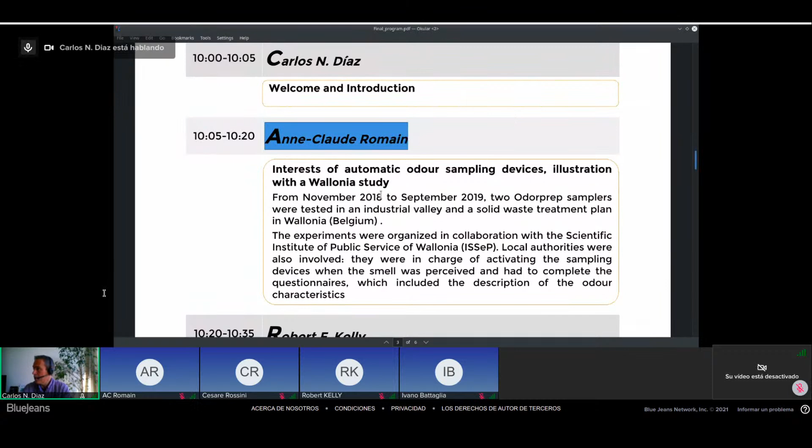So for this presentation, I'd like to comment a little bit on the program. So we have our first speaker, Anne-Claude Romain, who will speak about the interest of automatic odor sampling devices, with illustration from the Wallonia study.

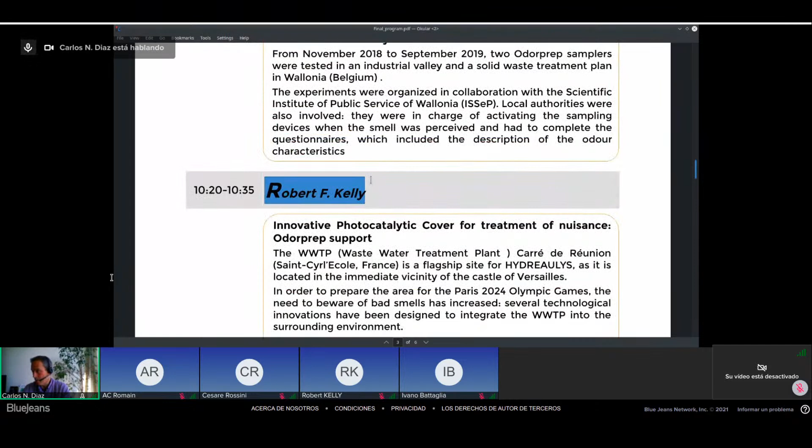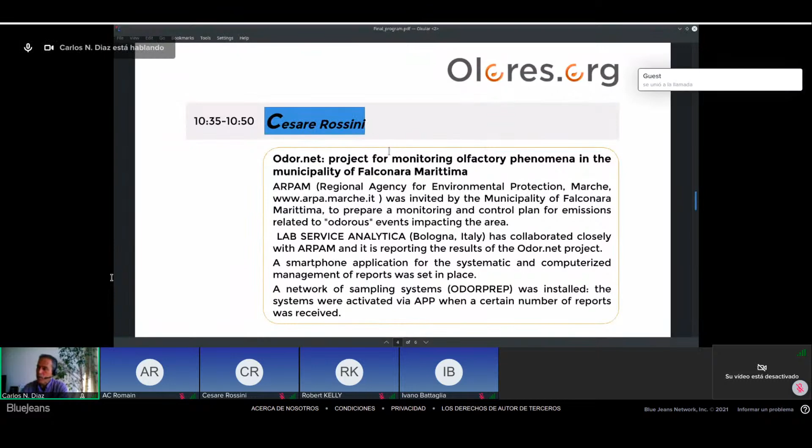Afterwards, Robert Kelly, Mr. Kelly, will speak about innovative photocatalytic cover for treatment of nuisance, Odorprep support. Later, Mr. Rossini, Cesare Rossini, will speak about OdorNet, a project for monitoring olfactory phenomena in the municipality of Falconara Marittima.

And our last speaker will be Federico Cangialosi, and he will speak about mechanical biological treatment plants, statistical evaluation of hydrogen sulfide and ammonia concentrations in ambient air, and criteria for automatic odor sampling.

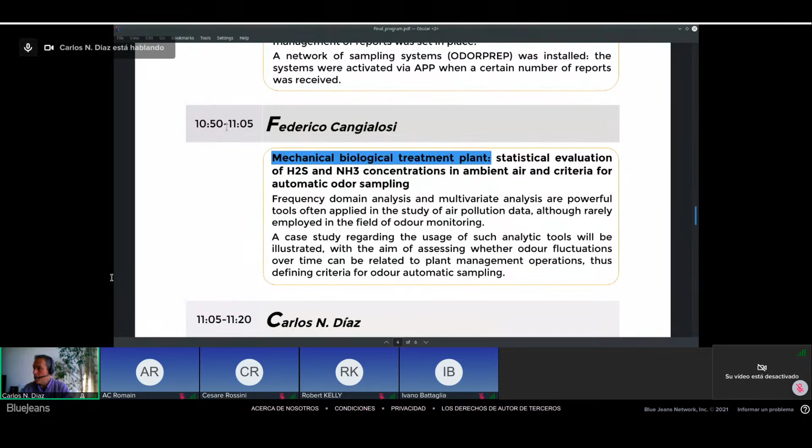Each speaker will speak for 15 minutes, and then we will have a round table that you can join. So there will be two ways to ask questions if you want. First, it's our YouTube channel - you can put your questions in this chat, and I will read them once I get them.

So there will be two ways: with the YouTube channel you can post your questions here, and if you want to make your question yourself, you can join this meeting room, and you are more than welcome to do so for any question or comment.

I think we are going to start now, and I would like to introduce you to Anne-Claude Romain. She studied chemistry and environmental sciences at the University of Liège in Belgium, and obtained a PhD on sensor arrays for environmental odor monitoring. Professor Romain is head of the research group Sensing of Atmospheres and Monitoring at the University of Liège, SAM, in Arlon, Belgium, since 2014.

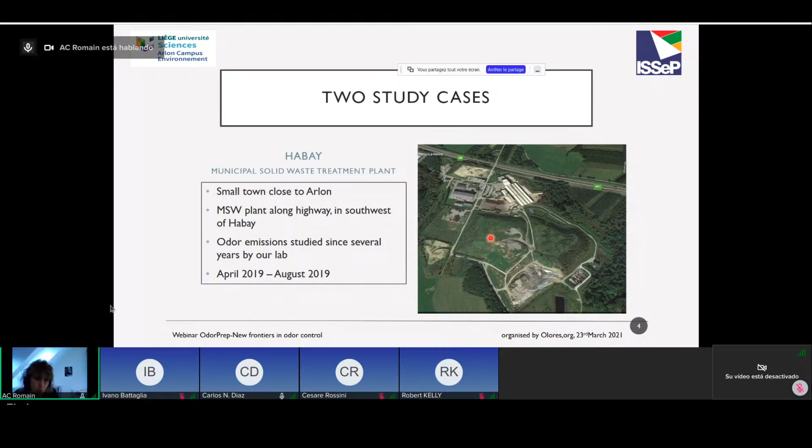The second case was Habay, an area our lab knows very well, having performed several odor measurements there for several years as well. The study was shorter, only 3-4 months, but I will not focus too much on this case, because we don't have time in 15 minutes to present everything.

Lab Service Analytica - I'm sorry if I don't use the correct term - Cesare lent us 2 Odorprep samplers for about 1 year. ISSeP installed 2 trailers equipped with chemical analyzers to perform continuous measurement of chemical compounds. We performed olfactometric analysis, and we used ADMS as an odor dispersion model software.

We also installed our own IOMS - Instrumental Odor Monitoring System - the new acronym for enose, at the site of Habay, but I will not focus too much on that today. What's also important in this study is that there's an app on the mobile phone for triggering the automatic sampling, which involves external people.

In this project, we involved 2 environmental officers of the municipality of Engis, and for Habay, a technician of the site, because they have to trigger the sampling with their smartphone, and so they are in charge of doing this. In addition to this, we gave them a questionnaire to fill in with a predefined frequency.

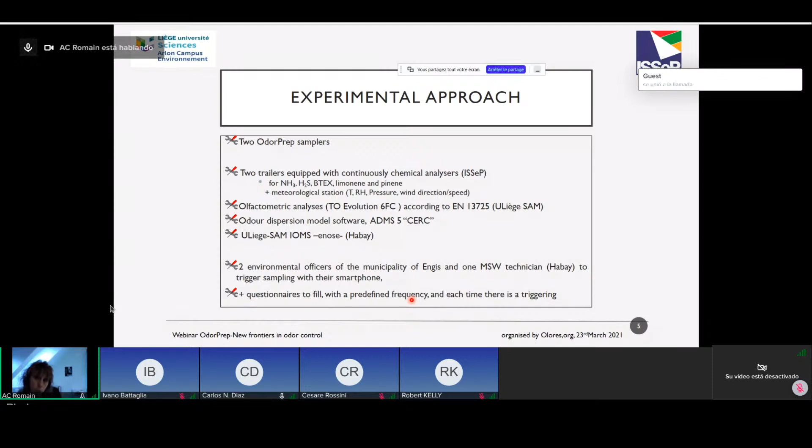And of course, each time there is a triggering, this questionnaire, among different things, requires them to mention and characterize the odor they smell, to be able maybe to identify the source, because as I explained for Engis, there are different sources of odor and different kinds of smell.

The recording has started. Sorry, I heard something strange. Sorry, it's just the recording. Just go ahead, Claude. Okay.

the sampler here, really close to one of the main odor factories here. So in the fence line, in the parking of this factory, and a little bit farther, the distance is about 350 meters from the parking.

It is close to a school, and the officers that have to trigger the automatic sampling are about 1 kilometer, a little bit less, from the automatic sampling system device. So I'll have no time to explain this.

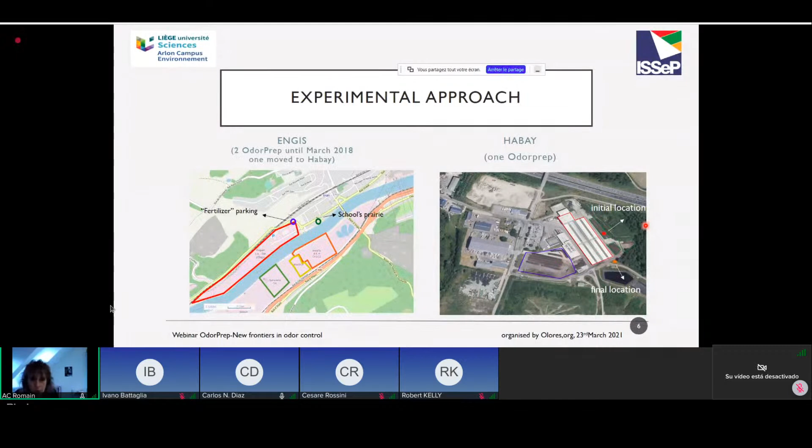So I go up. So 3 pictures to illustrate the localization.

You have the school here, and we installed the Odorprep in the prairie of the school. The big fertilizer factory is on the left side of the picture here, and the river, the Meuse, is in front of the school here.

You see the trailer, you see my colleague, my collaborator, Sébastien Failly from ISSeP, and the famous César here. And you can see that in the streets here, they are quite

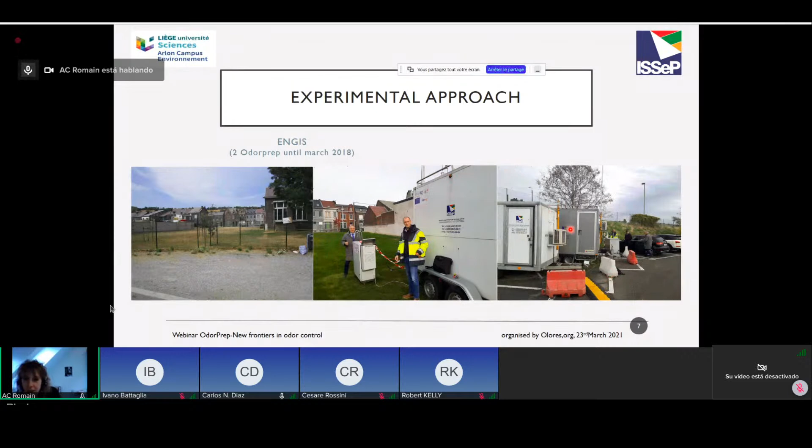typical organization of worker dwelling, worker homes here in the street. It is the parking of the fertilizer factory here, and again, the trailer and the Odorprep system.

So I would like to explain more data and results we got in Engis, but the time is very short, so I will have no time today to go into more detail. For your information, I will explain them in more detail during NOSE 2021. So this is also the reason why I don't want to give too much detail on this result.

But however, you can see that on the 2 locations in Engis, we got 6 triggerings, about 5 days during 8 months of study.

So it's really low, and we are a little bit disappointed about these results, because usually there are more complaints, and we really wanted to get more data for our study.

For the citizens, it's great, but for us, it's not so great. It was not so great.

And you can check here the value, the concentration you get, so in the fence line, and a little bit farther, so at the receptor level here.

We can discuss, but I will not do it, how we could use this kind of information to perform odor dispersion modeling, but I will not take too much time on this today.

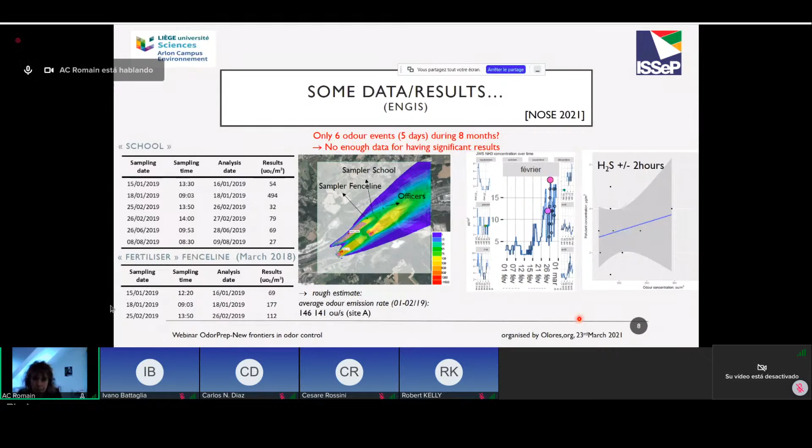So the main scope of this Wallonia project was to evaluate Odorprep, and it is the title of my talk here. I would like to give you my first impression, but it was 2 years ago, so to be honest, I haven't really tried the Odorprep system since this first experience for different reasons. Maybe there are some aspects that have changed since that time.

But however, the good point of this automatic system is that it is really a good approach to be able to collect odor at the receptor level. It's a good way, really a sampling that is representative of the perception at the receptor level, because it is activated, triggered by a mobile phone app, by a citizen, by an officer, by a company. So it is really interesting from that point of view.

As you probably know, sampling at the receptor site is often challenging due to the low odor concentration that we have at the receptor, and even sometimes at the fence line. As you all know, especially if you have already performed field inspection - in Belgium it's a way that is used frequently - the perception time of an odor is short, it's called a puff. So in that way, if the people that trigger the activation of the sampling are really representative of this, we are able to catch a low odor concentration.

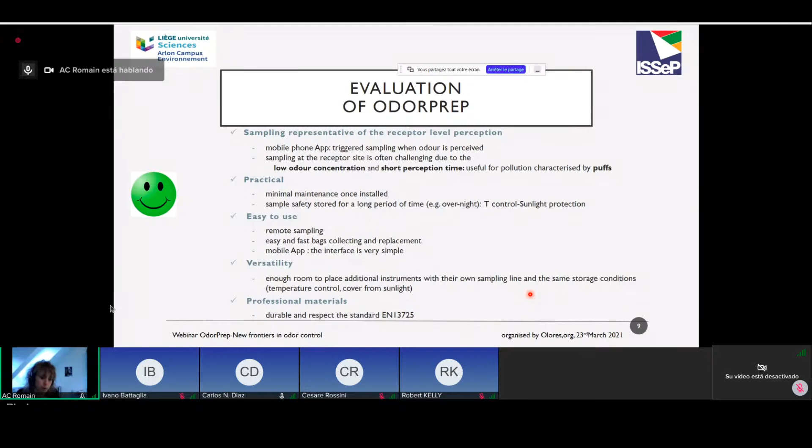However, we had some proposals or some questions that we can discuss, but again, maybe there have been changes now since 2 years ago.

The trouble maybe could be linked to the electrical supply, because we also have automatic sampling systems with battery, since it's quite light and we can move it very fast. But here, for temperature control for instance, we need high voltage, so it's important to notice this - you need to have access to electrical supply.

The size of the sample bag could be a little bit higher, especially when we are working at the receptor level, because the concentrations are very low.

When we tested the Odorprep system, we only had Nalophan materials at our disposal, but as you know, for some compounds - especially ammonia and H2S - that's not a good one. So I guess maybe they propose other kinds of material now.

The flow adjustment - it would be great if we could be able to adjust the flow ourselves. And we propose maybe to couple this device with a cloud to have an idea of the localization, and maybe a webcam to be sure that people don't put a strong odor above the sampling line. Why not? You can imagine.

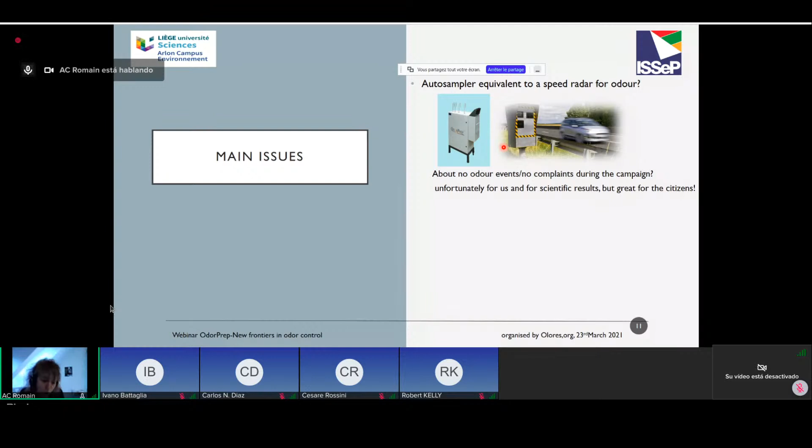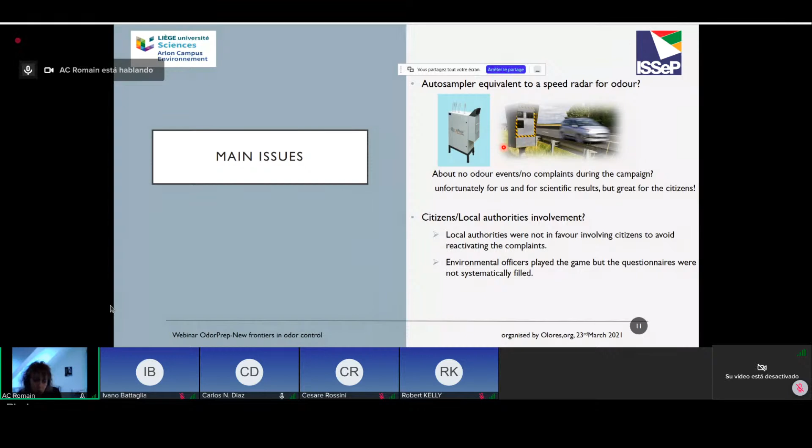Involvement of the citizens was not as nice as we would like to have had, but I have no more time to go into more detail, because Carlos reminds me that I don't respect my time, as usual.

I'm sorry. So I mentioned here the main interest because it was the title of my talk, and I expose here also the main interest, but I have no time. You can read it, since you will have my presentation at your disposal, and so you can see here the consideration regarding the interest of this system. Thank you very much, and sorry for not respecting my time perfectly.

And thank you to Sébastien. I know he's listening now, and my colleague Noémie, Cédric, David, Axel, and the people that were involved in the 2 case studies. Thank you.

Today, I'd like to present to you one of our solutions within Suez, which we call ActiLayer. It's an innovative solution for the treatment of nuisance odors from diffuse sources via photocatalysis. And of course, the link to the previous presentation is how we integrated the use of the Odorprep automated sampling device within 2 reference projects that I'd like to share with you.

So just to quickly get started, so you have an idea of who our team is, because Suez is a large organization. We're part of a division known as Smart Environmental Solutions, and in fact, we're the Air and Climate division.

So if you look at our activities, they fall into 3 main categories. The first, which we'll focus on today, is really about nuisance odor impact and integrating industrial activities within the local environment. So we're really focused on odorant compounds, volatile organic compounds, H2S, reduced sulfur emissions.

We also work more and more on urban air quality initiatives, and you'll see it's similar strategies, but on different types of pollutants, with a link more focused on public health initiatives. So we're talking about fine particulate matter or NO2 emissions.

And then finally, the third category is on surveillance and mitigation of greenhouse gas emissions. So not really an air quality initiative per se, but more linked to climate change initiatives.

But irregardless of which of these three areas we're working in, what's important to know is that we operate as a solutions integrator. It means we work with an ecosystem of partners such as LabService Analytica. We're not only working with in-house solutions, we're trying to bring to our clients the best of technology that's available on the market. And we're present along the entire value chain.

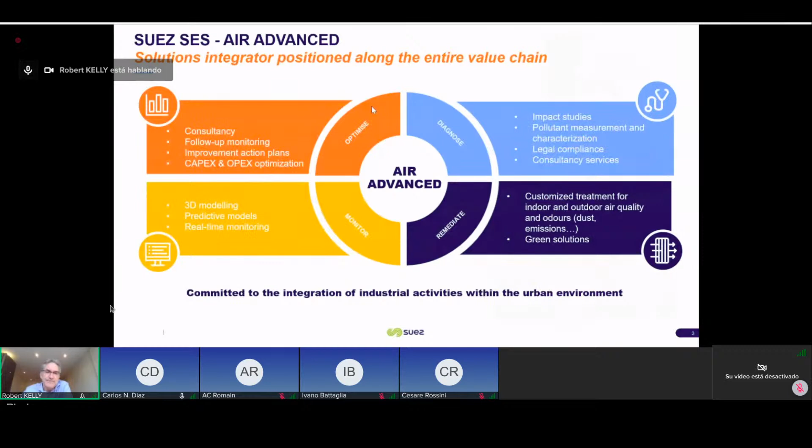But really, irrespective of the project, our main focus, our commitment is to identify strategies to better integrate industrial activities, industrial infrastructure within an increasingly urban environment. I'm sure many people have noticed that infrastructure such as wastewater treatment plants, composting facilities, landfilling activities, or even industrial parks are really facing urban encroachment. It means we have residential neighborhoods coming up right up to the fence line of the facilities.

And so we have to come up with innovative strategies to go beyond just risk management and to really focus on environmental footprint and really having a more proactive approach in terms of quality of life for the local community.

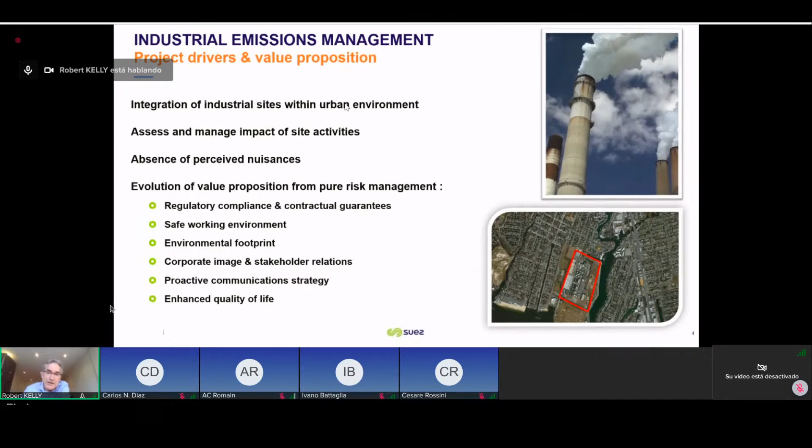So with that, I'd like to focus on really two technologies today. The first, on the treatment side, is our ActiLayer technology. You can see here an installation that I'll focus on just outside of Versailles. It's a photocatalytic cover. But what's interesting is that it really performs a couple of functions in one.

Well, first of all, it's a cover, so we have confinement of emissions. But here you can see a simple schematic of how it's made. So we have an activated carbon layer, so we have adsorption of any pollution below the cover.

We have an integrated titanium dioxide catalyst, which with UV irradiation, so sunlight, is going to produce free radical species that will degrade any pollution that is adsorbed in the activated carbon layer. So we have complete mineralization of the pollution and regeneration of the activated carbon.

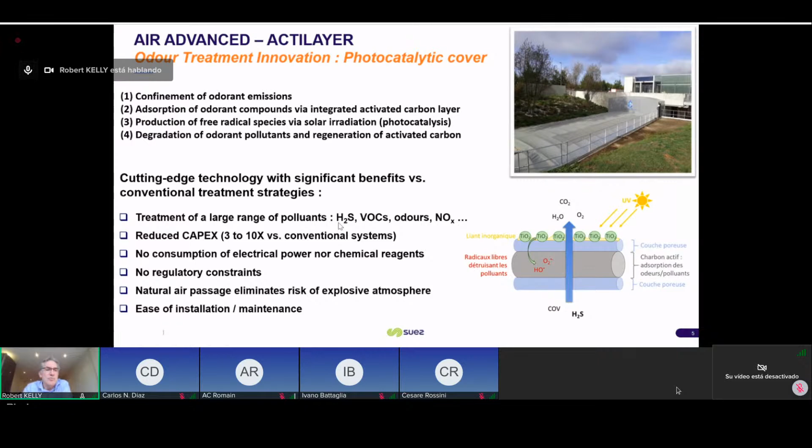For us, it's a very interesting strategy for treatment of really difficult emission sources, open air tanks or canals with diffuse emissions. Much lower capex than a traditional approach where if I had to put in place a concrete cover, a ventilator to extract the air, and a dedicated odor treatment system. I have no electrical power nor chemical reagents, so it's very easy to put in place and to maintain.

And of course, the second innovation I'd like to focus on with these couple of references is the Odorprep device. Anne-Claude presented it earlier. Really what is of great interest to us is the ability to do remote sampling on demand by plant operators, by a system administrator in the middle of the night whenever we have an odor event. And also the fact that we can tailor the configuration of the device to have different types of sampling. So we can have cartridge sample for collecting an air sample for dilution olfactometry, or we can put in a Tenax cartridge for VOC screening, for example.

And just to walk through quickly two use cases. So I mentioned this is the Carré de Réunion wastewater treatment plant. It's in close proximity to the Chateau de Versailles. Here you see this is the inlet wastewater channel. You can see it was an open air channel, approximately 200 meters in length.

You'll see in some pictures that we have a new tramway passing directly in front of the plant. And in 2024, the equestrian show jumping events will be located quite closely. So the local mayors are very sensitive to this open air source and asked us to come up with solutions.

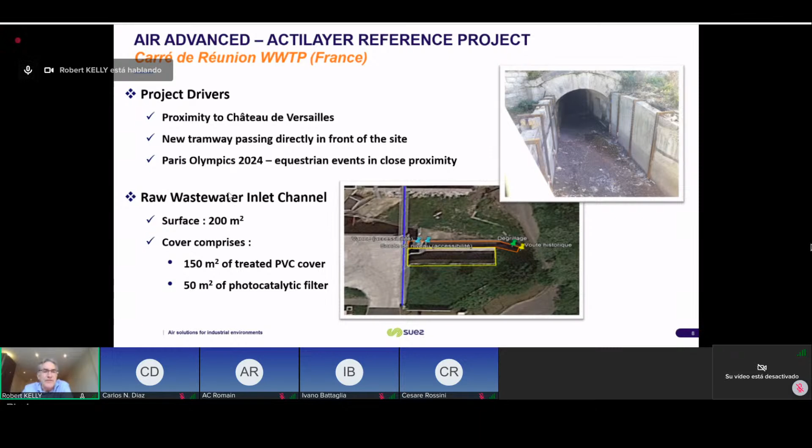Well, after comparing different alternatives, we decided to proceed with a photocatalytic cover. Of course, we used the Odorprep as a sort of innovative performance monitoring strategy. First of all, to sample before we put the cover in place over several months to understand background odor concentrations.

The Odorprep was configured with two parallel channels, again with sampling bags for conducting odor concentration in the lab via dilution olfactometry. And we could remotely sample whenever the plant operators told us that there was a nuisance event in the vicinity of the channel. We could remotely take the sample.

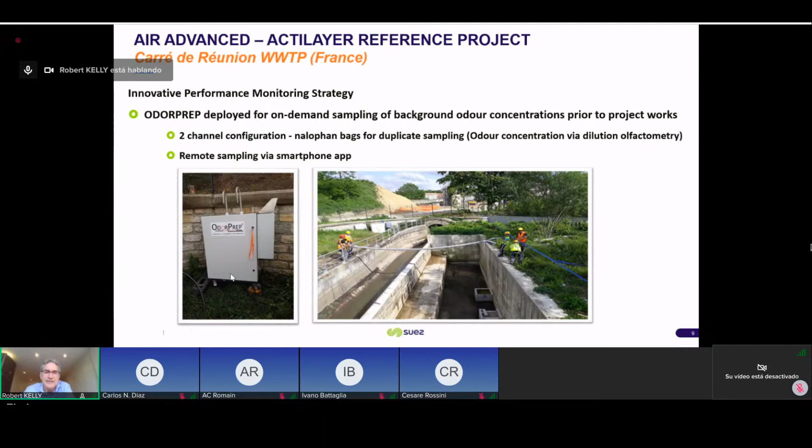Well, just some images of putting the cover in place. So here we put quite a sophisticated support structure because the vault was actually, well, it's a side story - it's a national monument, it's Louis XIV. So the client wanted to preserve this kind of vaulted look of the overall finish.

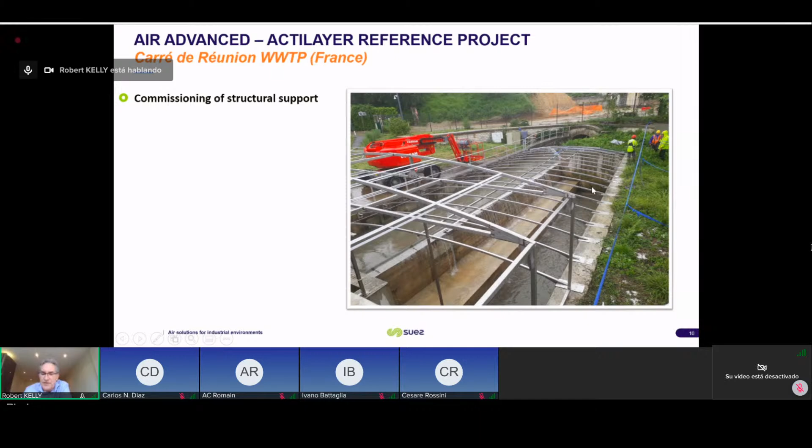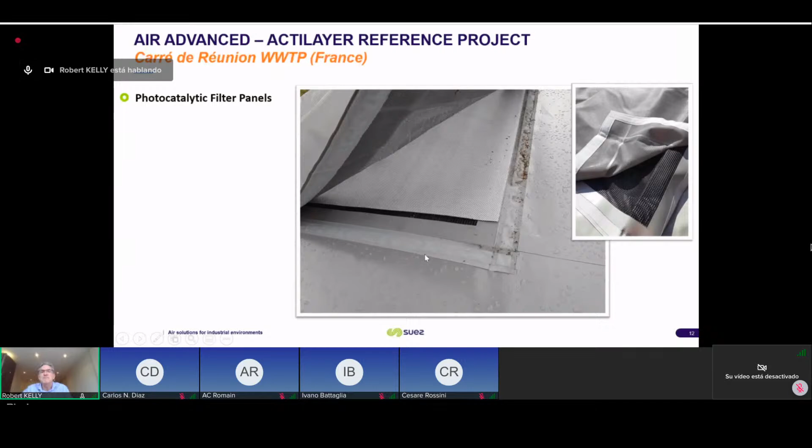Here you see us putting the actual cover in place. Just a close-up on the photocatalytic filter patch. So you have a type of chemically resistant PVC cover, and then these photocatalytic filter patches that are placed using heavy-duty Velcro at intermittent intervals integrated within the cover.

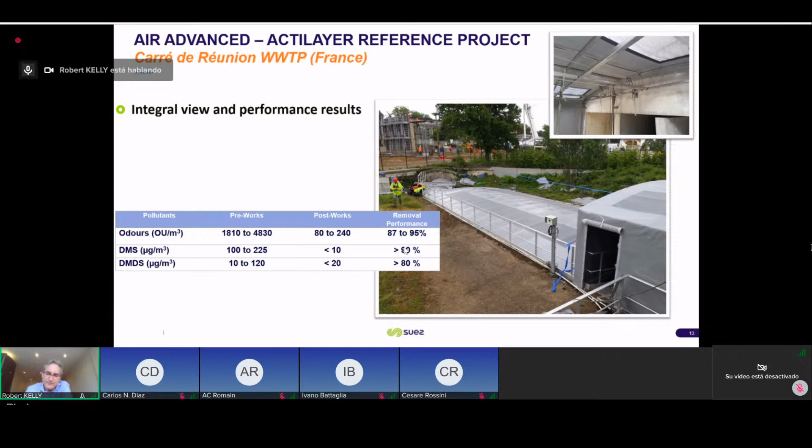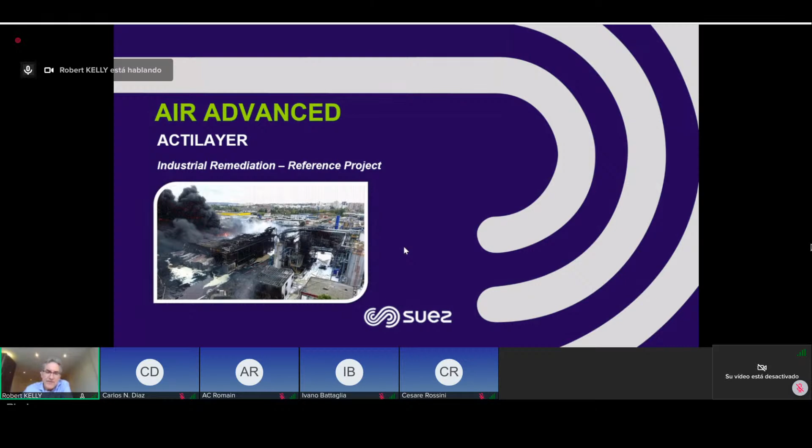And just to focus on a second reference case to give you another idea of how we used the Odorprep. What I should mention is on the first project, it was a loan from Lab Services Analytica that was part of an ongoing European initiative that they had to test the Odorprep device. For us, we were absolutely convinced on the interest, and we purchased, subsequent to that first trial, 2 units for use on this next project.

So here we're dealing with a different type of a project. This is an industrial remediation subsequent to an industrial warehouse fire. So here you see an image of the fire where you had a chemical warehouse that was storing highly odorant compounds.

Our project within Suez and our partner consortium was to demolish the remaining structures and remediate any waste debris on site. We had a lot of barrels in various states of degradation that needed to be remediated on site.

What was very important for the client was to have real-time air quality monitoring, as well as nuisance odor impact monitoring, as a critical decision aid tool to manage the on-site works with as little impact on the surrounding neighborhoods as possible. We're directly inside the city, with apartment complexes just a couple hundred meters away. This was also highly publicized, with a lot of news media coverage, so we wanted a very transparent and reassuring communication strategy.

We configured each of the Odorprep units as dual channel units, with sampling for dilution olfactometry but also TDX cartridge sampling, since we knew VOC emission screening was a big part of what our client wanted to focus on.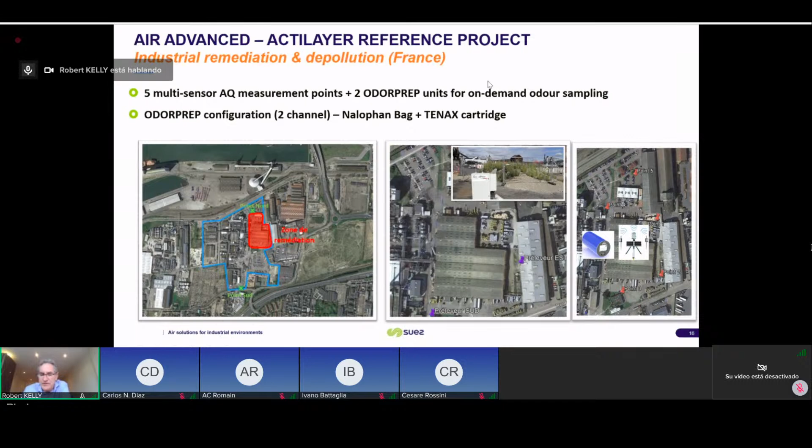The other critical highlight of this project is that we had to build a temporary support tent for handling the most sensitive waste. These uncombusted barrels of compounds that were highly odorant were taken inside this tent for cleaning and pre-treatment before being taken to an offsite waste handling facility.

Here we have a combined ventilation and air treatment system where photocatalytic filter patches are directly built in - these are coated canvas ventilation gains with photocatalytic filter panels integrated within one face of the ventilation gain.

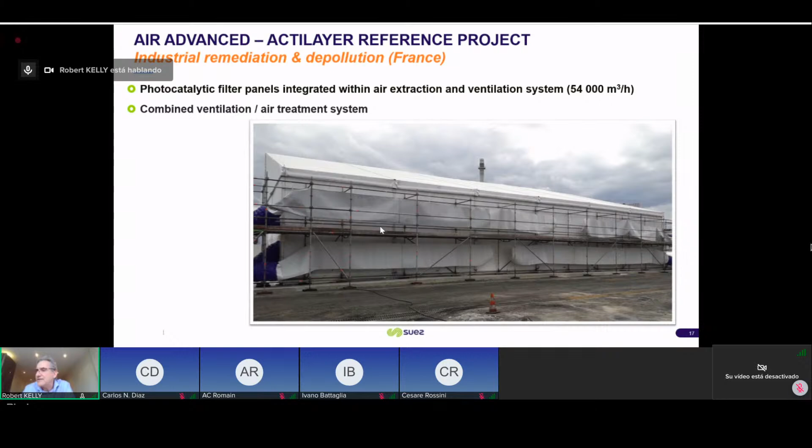We used the Odorprep at the very beginning of the project to better understand what types of compounds we were dealing with and their odorant effects. We used it inside the tent as a pre-screening test, collecting samples whenever operators informed us of highly odorant species present. We'd collect on-demand samples and send them to the lab for GC-MS sniffing, so even for compounds present at very low concentrations but high intensity odor, we could try to identify the compound.

We also used the units once the project was up and running and our treatment system had been properly tested and validated. We installed the Odorpreps at the 2 points I mentioned, at the limits of the remediation works, to survey in real time, doing both automated sampling whenever we had a resident complaint, and programmed sampling since we had environmental reporting to do throughout the project.

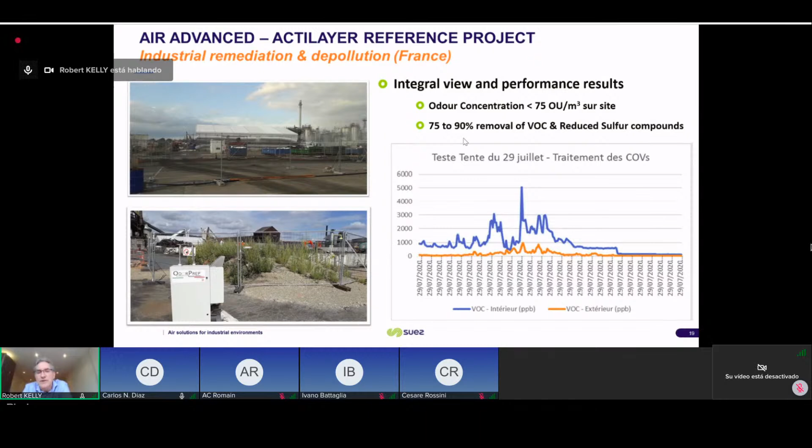What I can show is that at the limits of the works, we never had odor concentrations that exceeded 75 odor units per cubic meter. And in the vicinity of the tent, comparing the interior versus the exterior, we showed on the order of 75 to 90% removal of both total VOC compounds and total reduced sulfur compounds - so very efficient performance.

You have 1 minute, Robert. And that is the last slide, Carlos. So that works, yeah, just wonderful. I'll be happy to answer any questions later on during the roundtable.

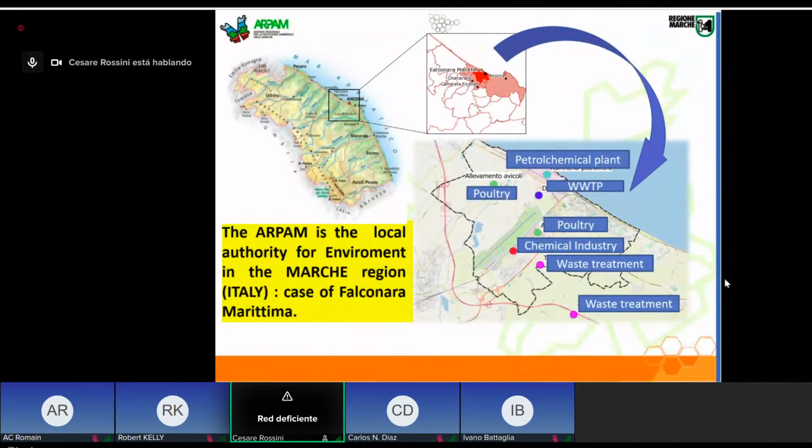The area that ARPAM wants to keep under control has different environmental pressures of anthropogenic origin. There are relevant infrastructures like the Adriatic Railways line, the State Road Adriatica, the civil airport, and importantly, industrial activities that due to their impact need regional and provincial authorization—mainly petrochemical plants and wastewater treatment plants.

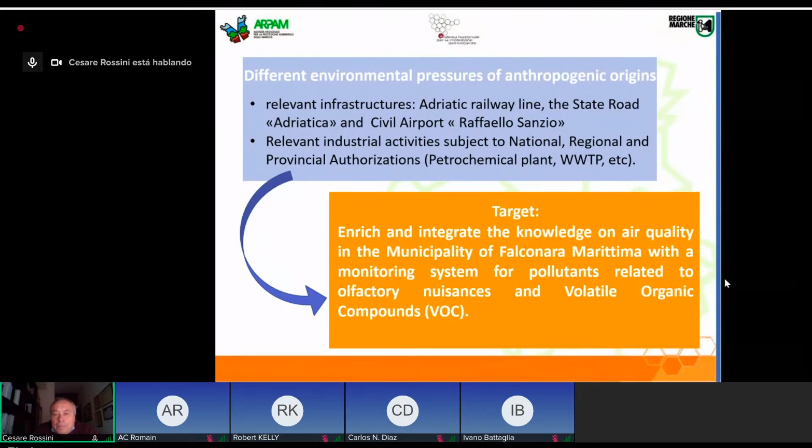So what was the target? The target was to enrich and integrate the knowledge of air quality in the municipality with a monitoring system for pollutants related to olfactory nuisances and volatile organic compounds.

What was the starting point? In Falconara Marittima, citizens had long been concerned about the presence of odor and related discomfort, but reports were done by telephone. These telephone reports were collected by the municipal administration and police but were not treated in a systematic manner regarding the entity, the type of perceived odor, the weather condition, and the wind direction.

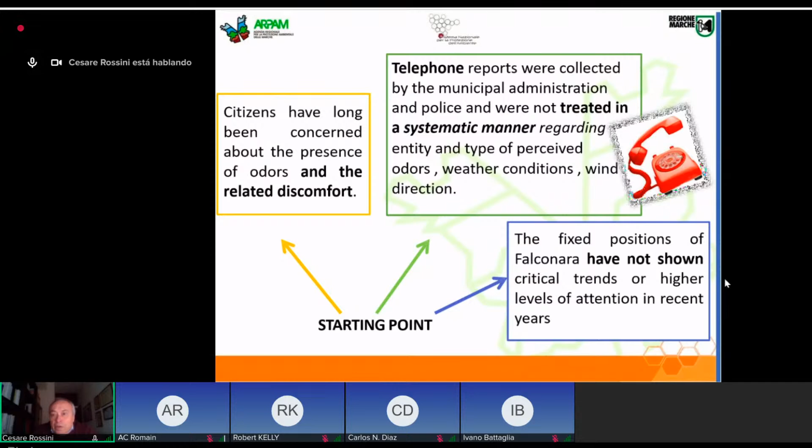So ARPAM, the local authority, was invited by the municipality of Falconara Marittima to prepare a monitoring and control plan for emissions related to odorous events impacting the area. This plan is based on the computerized and geo-referenced management of citizen complaints of olfactory harassment, allowing immediate intervention capable of answering: which area of the city is most affected by odorous events? What are the trace substances present in the air and at what concentration? And what are the sources of emission?

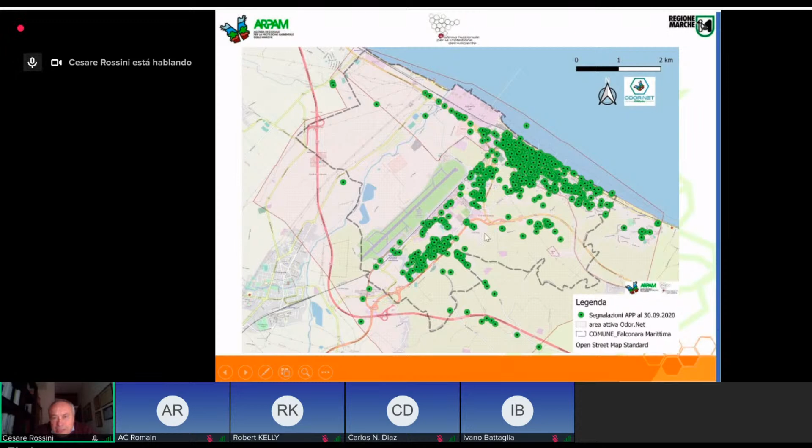Worth mentioning, looking at the statistics, is that odor events clearly show a peak period—August, September, July—clearly in the summertime. Also worth mentioning is the growing interest of the population in being part of this GIS exercise. At the beginning only 41 people took part, but by the end of the process, 340 people were participating. This means the population liked being involved in this type of surveillance exercise.

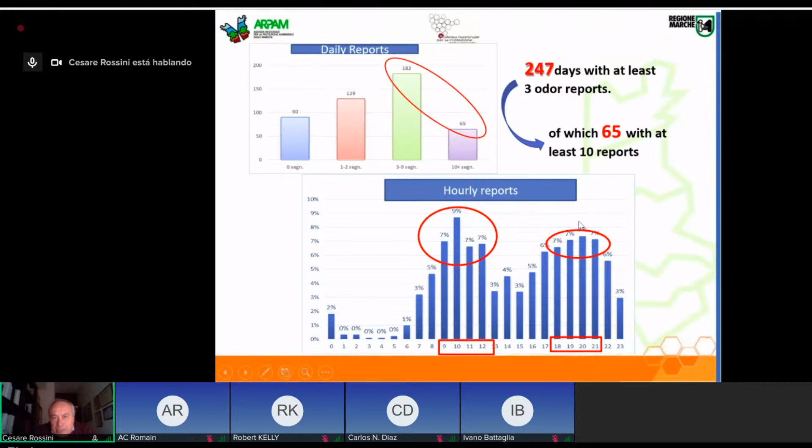Other information from this surveillance program shows that 66% of the odor reports described a hydrocarbon-like odor. Clearly the presence of the petrochemical plant is dominating the situation here. Also important is that more than 80% of the total complaints were evaluated as very strong or strong, as you see from this diagram. So definitely the impact on the population was heavy.

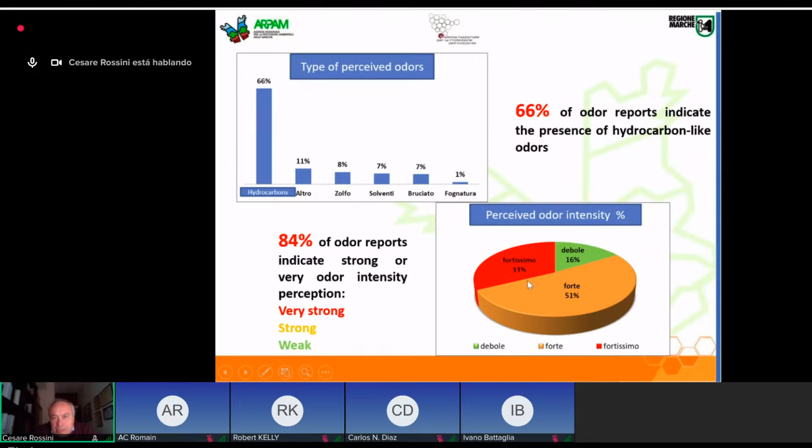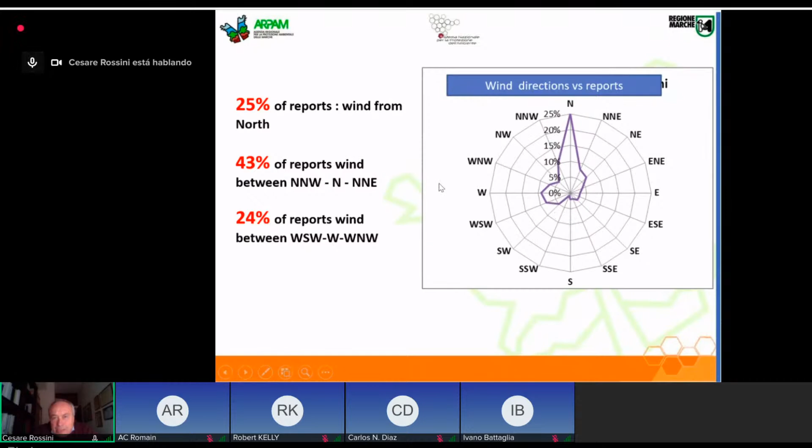We also collected information regarding wind direction, which mainly arrives from the north when you are perceiving the event. The study of the complaints shows the highest concentration in the site of Falconara Centro, and also this area is where there is the highest level.

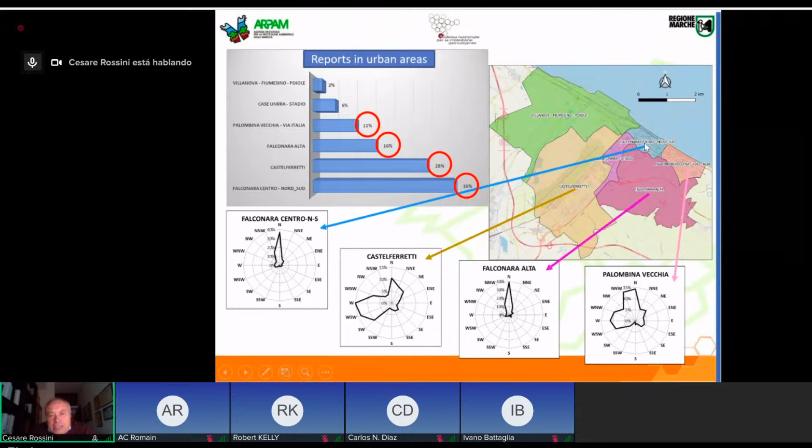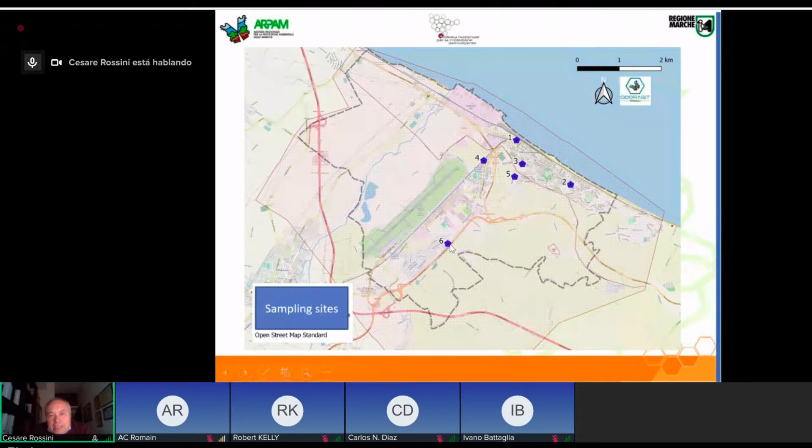We decided to have fixed positions for measurement. Five of them are very close to the sea, and one is more inland, close to the airport. The sampling started in July 2020.

Each sampling station consists of a Nalophan bag, two Nalophan bags, and a chemical cartridge. In addition, there was a PID detector analyzer for real-time monitoring of total VOC compounds, just to have a second source of information. There was also a weather station.

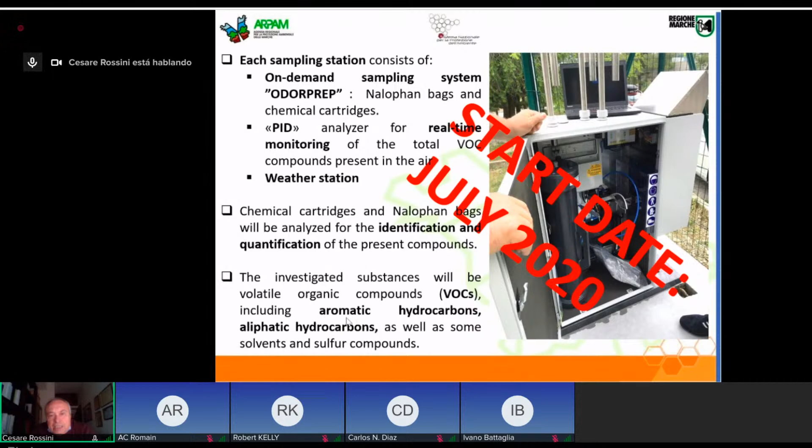The chemical cartridge and the Nalophan bag were analyzed for identification and quantification of the compounds present. Compared to the other exercises done by Claude and also by Robert, here the local authority decided to have only chemical measurement, since they have a lab able to perform this type of analysis locally. So the local authority decided to use this tool to investigate the volatile compounds, including all the different compositions.

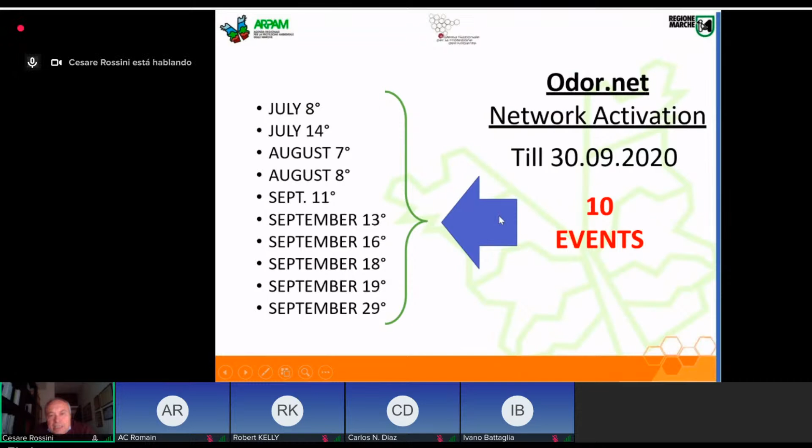What's worth noting is that during the summertime there were several events, 10 events. I will show only 2 of these, which are fundamental for understanding what was going on.

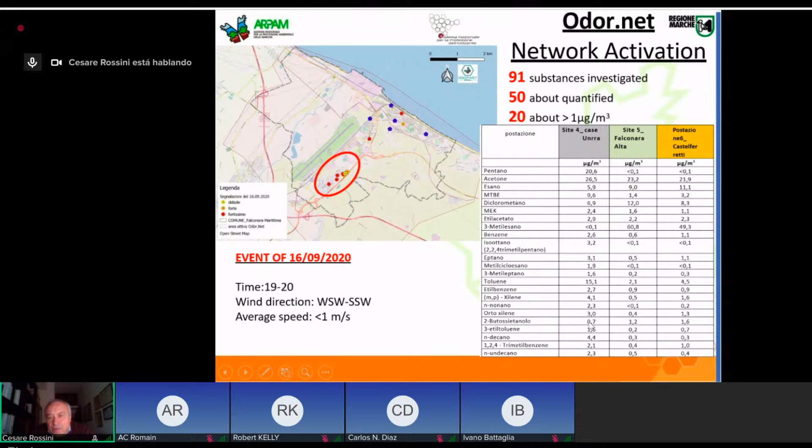To resume, since time is running: next steps are increasing the number of results and cases available over time. Statistical analysis can provide more information on the characterization of odor events in order to associate them with the value production process—this is the final goal. Clearly, transparency with citizens will continue, as well as the connection with local industry.

Thanks a lot for your attention. I hope this story can be interesting for you, and I hope to have you during the discussion for additional information.

Thanks to everybody. Thank you very much, Cesare.

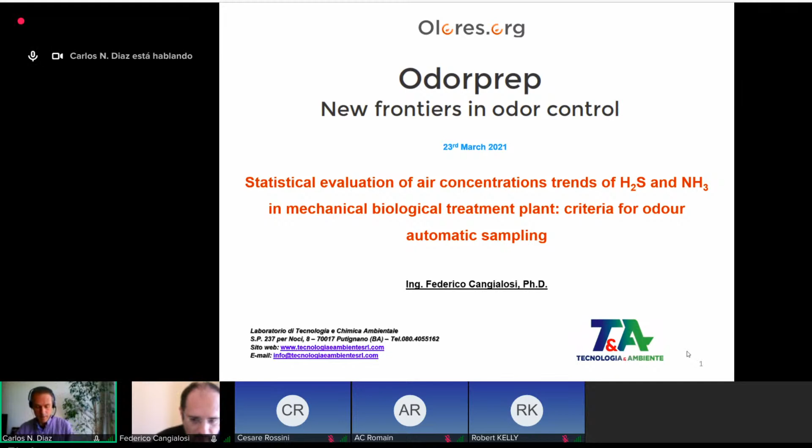Okay, thank you, Carlos. Can you increase a little bit the sound of your microphone? You hear me now? Yes, now better.

In our presentation, we will describe a case study in which we use the Odorprep systems and other automatic monitoring devices for identification of the odor complaints deriving from a nearby town. The goals of the research are the identification of the most suitable monitoring stations and chemical tracers for odor monitoring, and defining the criteria for odor automatic sampling.

So far, we have seen the Odorprep activated with human triggering. In this case, we will see how to define criteria for activating the Odorprep with instrument measurements. And we will use some interesting tools for continuous odor monitoring in terms of time series analysis, frequency domain analysis, and multivariate analysis.

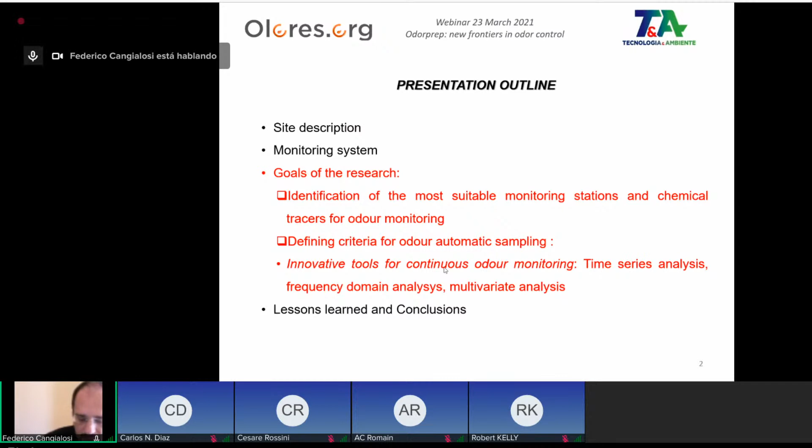The site is a mechanical biological treatment plant authorized to receive 550 tons per day of mixed urban waste, and 3 monitoring stations were installed in 2019. Station 3 was located upstream with reference to winds blowing towards the urban center, which is south, 1 kilometer from the plant, in front of the building for waste acceptance.

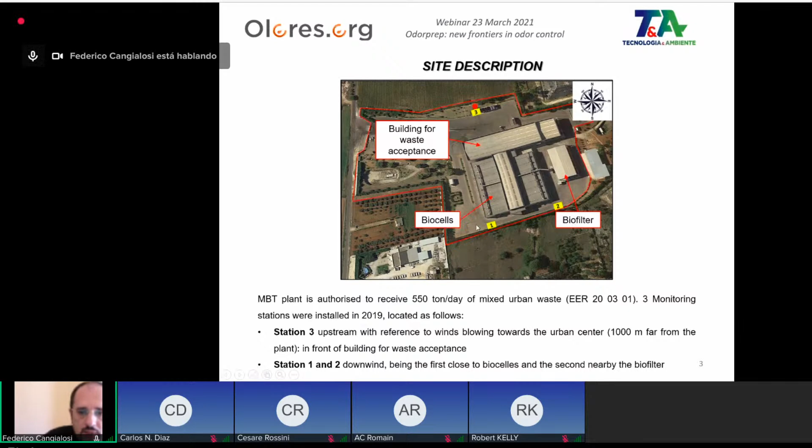Stations 1 and 2 are downwind, the first one located close to the biocells and the second one close to the biofilter. Each monitoring station was equipped with an H2S analyzer, an ammonia analyzer, and a VOC gas detector with the Odorprep V3. We also had the weather station at station 3.

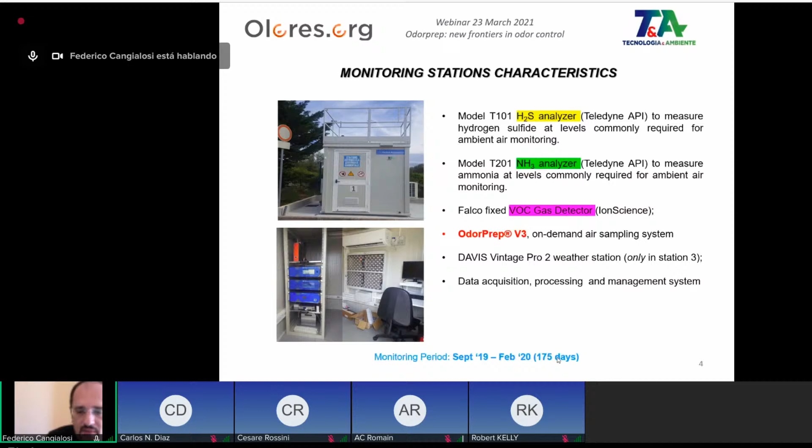The system was completed with data acquisition, processing, and management system. The monitoring period for this study went from September 2019 to February 2020, with about 175 days. The first look at the data we give in this presentation is the time series analysis.

Apart from a very high value on these days, we see quite low concentration, and we can see a cyclical daily component in the data. So it seems for this data that VOC is not related to the fluctuations of the emissions from the plant.

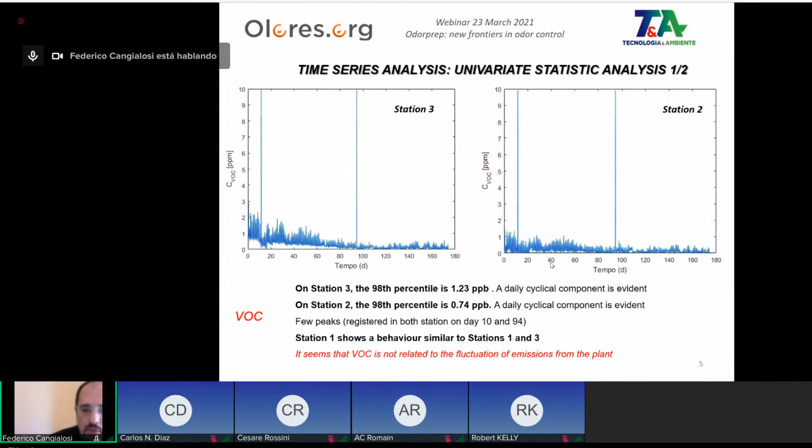In fact, if we look at the ammonia concentration in station 2 and station 3, we see a difference in terms of concentration. The 98th percentile for station 2, close to biofilter, is 303 ppb against the data from station 3, which is much lower. So it seems that ammonia could be a good parameter to be related to the odor emission from the plant, and in particular from the biofilter.

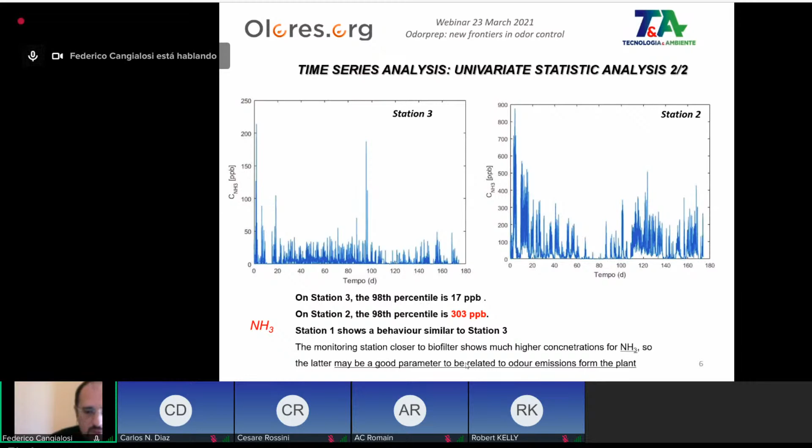We also performed a kind of analysis we call persistence analysis. This is an analysis in which we search for time intervals in which a certain threshold value, y, has been exceeded consecutively for more than x minutes.

All the instruments have a sampling frequency of 1 point each minute. So we decided that we can define an odor persistence if the concentration is above a certain threshold for more than 5 minutes. For the threshold values, we look at different concentrations. 3 values were selected for each station and each compound, 2 values below the 98th percentile and 1 value above that. For stations 1 and 3, they are the same order of magnitude, while in station 2, especially for ammonia, the values are quite higher.

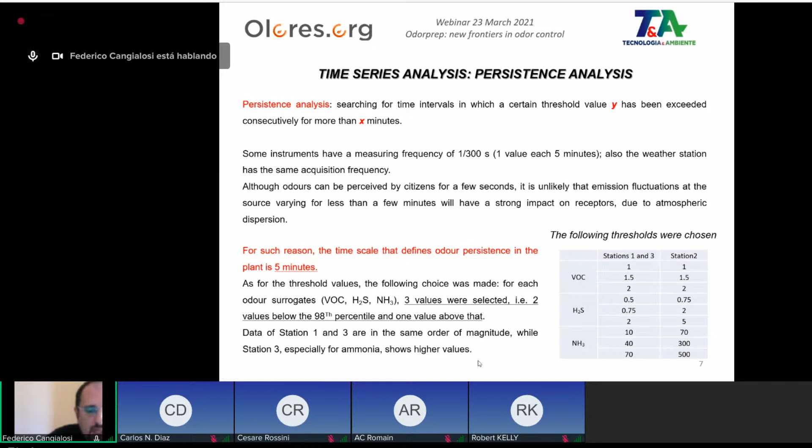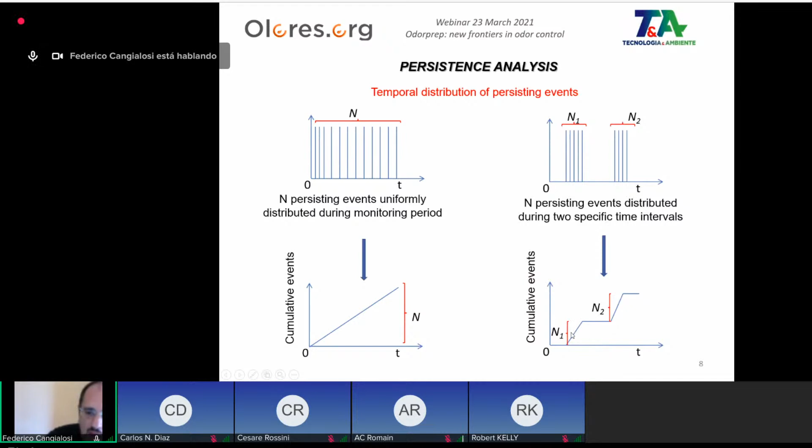While in the other case, if we have n persisting events distributed during 2 specific time intervals, like in this picture, the cumulative event distribution has 2 steps, like in this picture.

So if we look at the persistence analysis of ammonia at station 3, we can see that events above 10 ppb are quite frequent throughout the monitoring period, so we can say we have a uniform distribution. While extreme events at station 3, close to biocells—events higher than 70 ppb—occur in the first day of monitoring, shown by the red line here.

When we look at station 2, close to biofilter, events above 70 ppb are quite frequent, and we see here the step pattern.

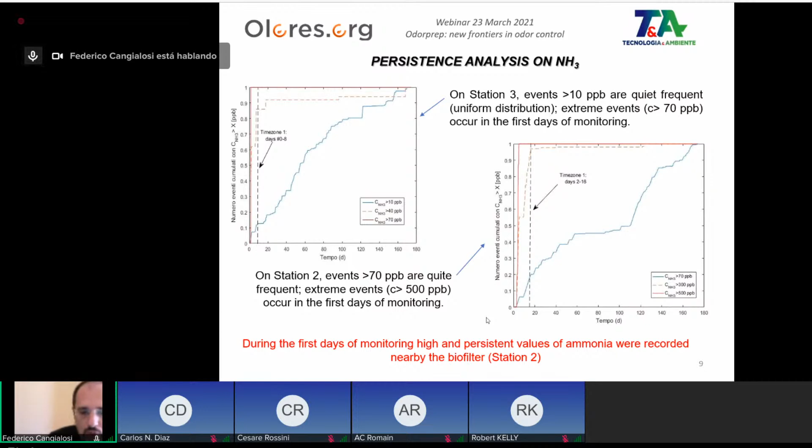So the first 70 days and the last 70 days, we have frequent exceedings of this concentration, while extreme events, when concentration of ammonia is above 500 ppb, occur in the first days of monitoring. So we can say that during the first days of monitoring, high and persistent values of ammonia were recorded nearby the biofilter in station 2.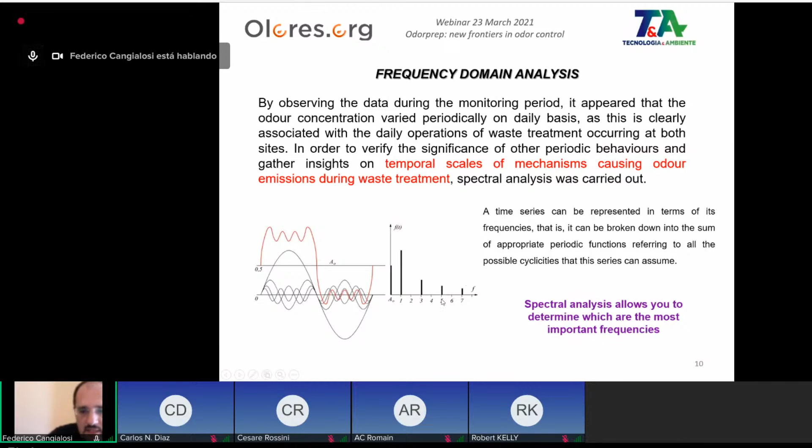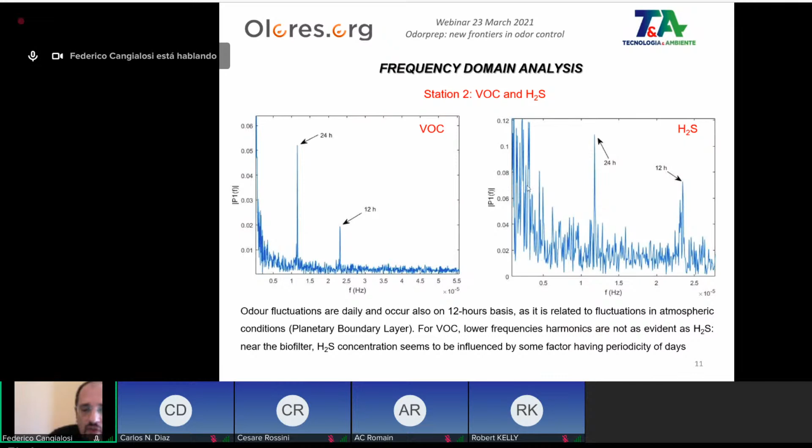For ammonia on station 2, we can see evident harmonics on 8 days and 5 days. It's very likely that these fluctuations are associated with emissions that follow the cycles connected to waste acceptance in the plant and waste biostabilization, which has a duration of 14 days. So we can say ammonia is the parameter closely related to fluctuations in odor emissions derived from waste treatment in the plant.

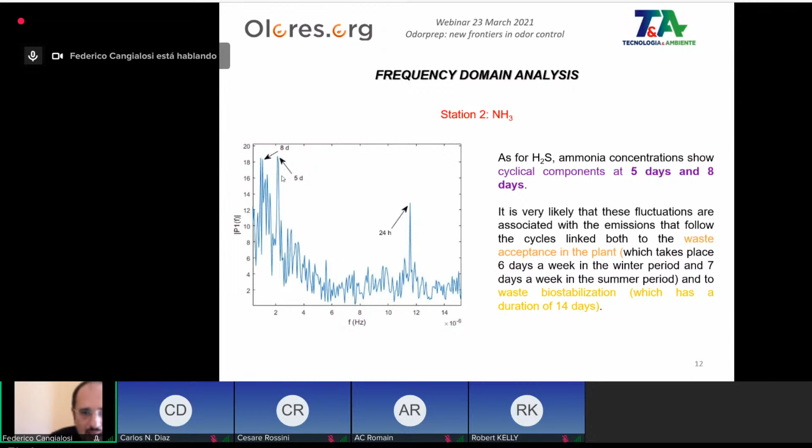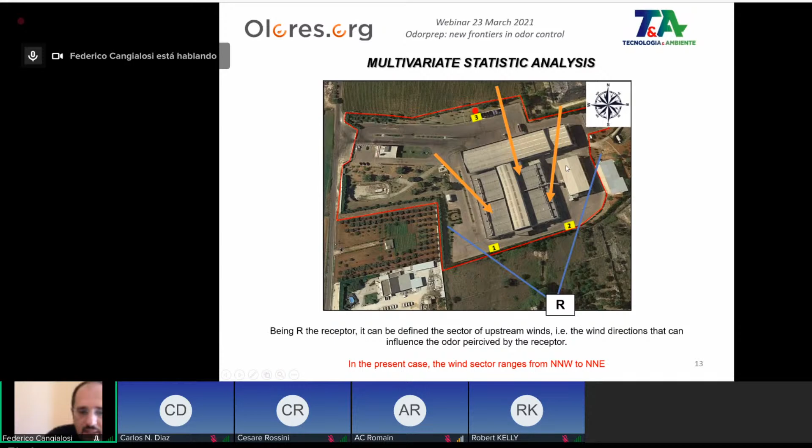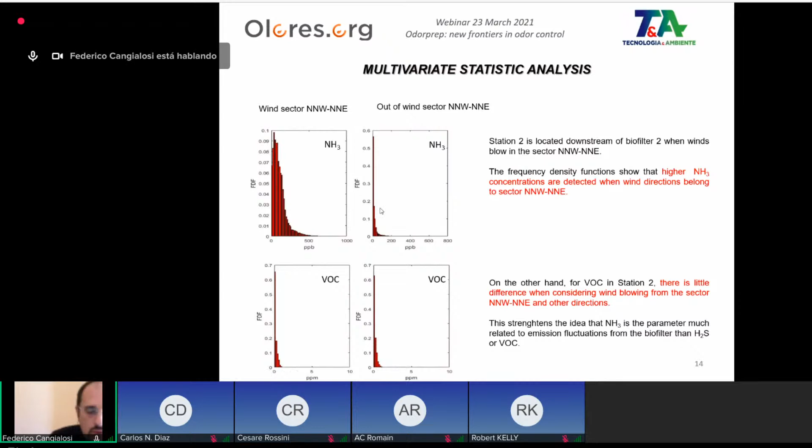If we look at the data for station 2, filtered by the wind sector, we see that for VOC there is little difference when considering wind blowing from the sector north-northwest, north-northeast, versus other directions. On the other hand, for ammonia, we have higher concentration when considering the wind sector of interest. So we can say that ammonia is the parameter clearly related to the emissions from the biofilter more than VOC. Here we make a summary of the lessons learned in this case.

In this case, the plant was not equipped with an IOMS, but with multi-instrumental odor monitoring. H2S and ammonia have common time intervals of persistence of events, unlike VOC. The spectral analysis highlighted cyclical behaviors related to the waste treatment process, most evident for ammonia, while VOC shows a cyclical trend on a daily basis for all the monitoring stations.

For H2S and ammonia, the upstream-downstream differences between the source, the biofilter, and the monitoring station are evident by analyzing the wind directions, unlike VOC. So we can say that without an IOMS, great care is required in choosing the most suitable sensors or chemical tracers to capture odor events related to the operation of the plant.

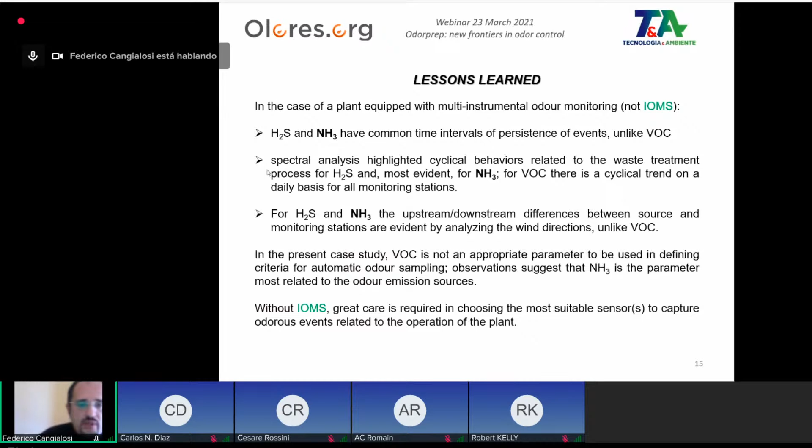So we can define the following criteria for Odorprep automatic sampling. First, we can consider that ammonia should be the only parameter to activate the automatic sampling, as its concentration is clearly related to biofilter emission, as we saw with multivariate statistical analysis. And the time series shows cyclical components related to the time scale characteristic of the waste treatment process, as we saw with the frequency domain analysis.

At time windows of 5 minutes beyond which we can find exceeding of a certain threshold, we can say that is adequate for taking into account medium and high persistence events. And so, on the basis of time series analysis, we can set a threshold of 500 ppb.

But in the period of analysis, we found a total of 79 events of concentration higher than this value for 5 consecutive minutes. These events during the monitoring period generated a very low number of reports from citizens. So we can say there is little evidence that such value, 500 ppb for ammonia, may be related to nuisance to the population. And so we introduced the concept of a pre-alert threshold.

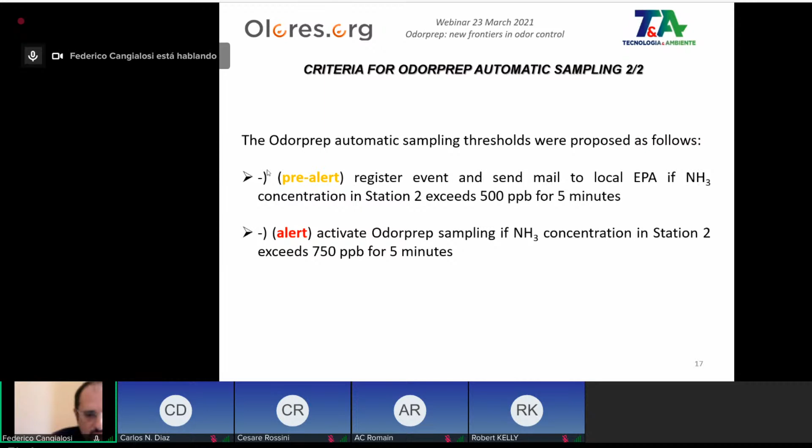Each time the pre-alert threshold is exceeded for 5 minutes, it will be recorded on a web platform and an email will be sent to local EPA. In synthesis, the criteria for Odorprep automatic sampling can be defined as follows: at pre-alert, we register the event and send an email to local EPA if ammonia concentration in station 2 exceeds 500 ppb for 5 minutes. At alert threshold, we activate our Odorprep sampling if ammonia concentration in station 2 exceeds 750 ppb for 5 minutes. This system has been operating for the last 2 months, and so far we have not received any alert activation, so we will see with the other data in the next month. Thank you.